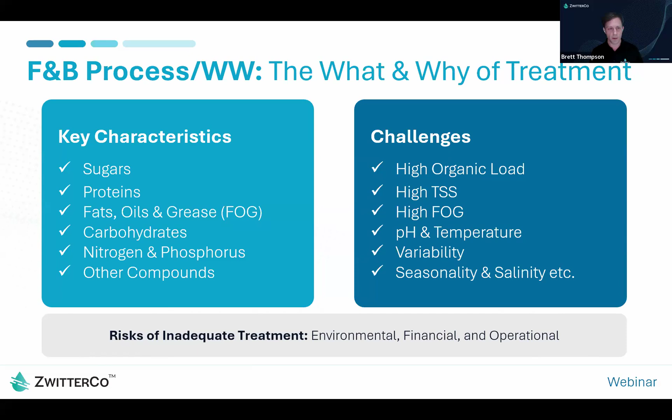Thank you, Brett. After talking about some of the treatment challenges that he was just mentioning, we're going to cover the reasons why there's a need to focus on the wastewater treatment of these plants. As this slide is showing, there are a number of different drivers shaping the wastewater strategies within food and beverage companies. First and foremost is compliance. Regulations around wastewater discharge are getting tighter, whether this is nutrient limits, contaminants of emerging concern, or needing to hit mandatory reuse targets. All are needing innovative treatment technologies to help treat these wastewater streams.

The second on this list is costs. Surcharges for discharge, hauling costs, and disposal fees can be significant at food and beverage plants. The right treatment process is going to drastically cut down on operational expenses to avoid these reoccurring charges.

Third is water reuse. This is becoming a major strategic sustainability goal for food and beverage companies that are trying to reduce their water usage rates. This is especially true in places that have to do water reuse because they're simply lacking available water and they're in water-stressed regions.

Fourth on this list is production continuity. Any disruption caused by treatment issues like too much fats, oils, and greases, variable flows, or changes in feeds can significantly interrupt operations. And finally, a lot of companies are looking to future-proof their wastewater treatment plants, looking ahead towards the next wave of regulations with nutrients and contaminants of emerging concern. Looking around the corner is enabling these companies to anticipate and be prepared for what is coming next.

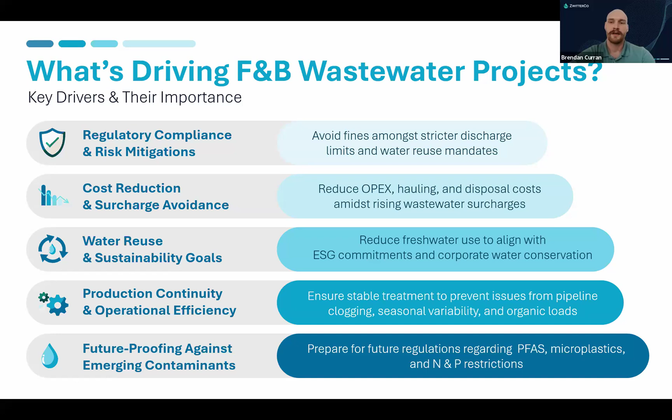Overall, it's not surprising that food and beverage companies are rethinking their wastewater strategies. So now Brett is going to take a closer look at the current treatment technologies that are being used and some of the gaps that are present within these wastewater treatment processes.

All right, thanks, Brendan. Yeah, so some of the most commonly seen wastewater treatment processes in food and beverage plants. Number one would be biological systems. So these are processes where you're using microorganisms to consume biodegradable material, which is typically measured by BOD or COD. And you can also remove suspended solids with these processes if you have a clarifier or an MBR to go along with the reactor. They can also remove nitrogen and phosphorus, some other nutrients from the water, depending on the organisms that you have. So some examples of these, activated sludge is kind of the conventional thing you think of when you think of biological.

These would be a continuous flow through reactor, usually a pretty big footprint. And then these other ones listed here, sequencing batch reactor, MBBR, membrane bioreactor. These are all ways to kind of consolidate the footprint and in the process to have a smaller process overall.

Dissolved air flotation or DAFs are also very common in food and beverage plants. These are, it's a physical process where you're trying to remove FOG and suspended solids, typically by adding coagulants like ferric or alum, and then polymers as a flocculant in order to try to group all of the suspended solids together so that they sink and are removed as sludge. And then you would add air into the tank to try to get the lighter organics like FOG to float to the top.

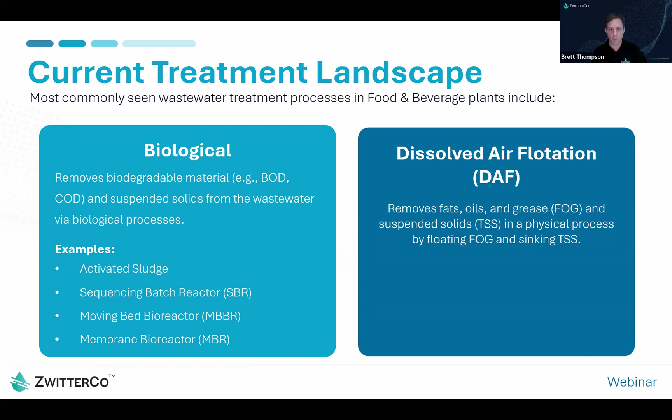So both of these are very mature processes, but they also have some drawbacks. So biological treatment will pass non-biodegradable material. We call that recalcitrant organics, which can lead to issues meeting COD effluent limits.

Biological processes are also sensitive to variations in feed water quality. So if you have different nutrients coming in, different levels of organics, temperature, pH that we mentioned earlier from some of the CIP processes, cleaning chemicals, you can actually stress the microorganisms, and that can result in issues meeting discharge limits. In a worst case scenario, you could actually kill off your microorganisms, and then you would have to spend time, days or weeks in order to rebuild their population. And during that time, you could suffer from fines, surcharges, or even in worst case, halt production.

DAFs are not as prone to catastrophic events as biological treatment systems are. But the issue is that they pass dissolved components. So these make up typically a large portion of your COD and BOD. They're not a positive barrier like membranes, which we'll talk a little bit more about later. So you can also see breakthrough of FOG, of TSS. And so typically to handle this, operators will overdose their chemicals or coagulant, flocculant, which ends up costing more money. And you see diminishing returns where you're adding more chemicals, but you're not necessarily getting better results.

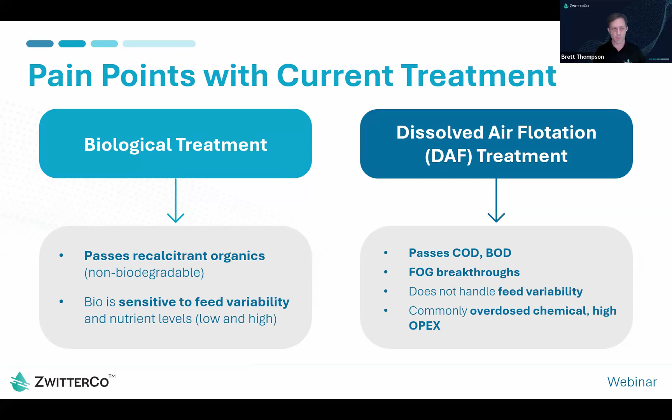So because irreversible organic fouling is such a challenge, researchers and companies have been trying to develop new material chemistries to deliver a meaningful step change, leap forward in membrane performance and to address fouling.

So one of these new chemistries has been developed by ZwitterCo and uses zwitterions. So zwitterions are small organic molecules that have an equal number of positive and negative charges for an overall net neutral charge, and they are extremely hydrophilic or water-loving. So they're so water-loving, they actually create a hydration shell, and that prevents interaction with organic foulants. So they're essentially an innate anti-fouling molecule.

Researchers have been trying to incorporate these into membrane chemistries for over 2 decades, but they're very difficult to handle. So the real breakthrough was incorporating zwitterions into a copolymer, an organic copolymer backbone, which provides structure. These zwitterionic copolymers are able to self-assemble into a zwitterionic membrane, allowing for an actual active layer similar to a polyamide on an RO membrane that's able to recover upon cleaning, even after being exposed to very high strength, high organic fouling wastewater, especially the wastewater you'll see in the food and beverage industry.

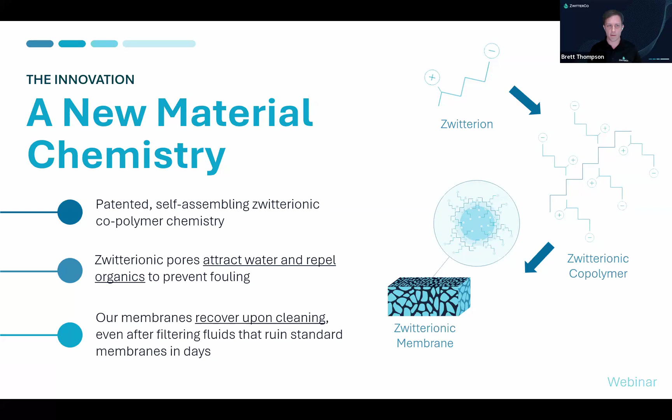I will go ahead and turn it back over to Brendan to talk a little bit about some of the technologies that we discussed. Thanks, Brett. As he was mentioning, the ZwitterCo copolymer chemistry is a technology platform that we've expanded across multiple different membrane products. So I'm just going to quickly discuss the 2 commercialized products that we have available today.

The first is superfiltration, which is what you saw in the video prior to this slide. This was the first product that was commercialized, and some of the key characteristics is that it is a 1 kilodalton molecular weight cutoff, so it's classified as a tight ultrafiltration membrane, meaning that it's still going to allow salt passage. There's 3 use cases for this superfiltration membrane product: treatment of wastewater for discharge, pre-treatment prior to RO, typically in streams like the above use case. We've also used it within process, specialty, and food streams for concentrating specific components within that stream. Like all of our products, it is used in high fouling feed waters. This product specifically is fully compatible with chlorine, and it is exceptionally well at handling oil and grease.

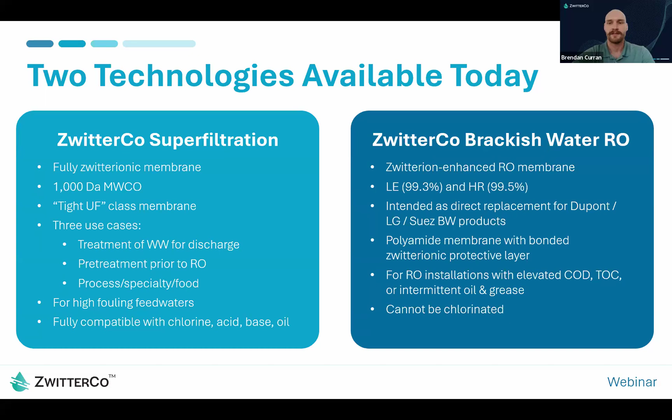As a result of the zwitterionic copolymer chemistry, we have built some of the world's most fouling resistant membrane products, specifically with organics. You are able to reduce chemical costs using these membranes. In a lot of our installations, we've been able to switch from expensive formulated chemicals to commodity cleaning chemicals, and we've also reduced the amount of chemicals and clean-in-place cycles needed. You are going to have faster cleaning cycles using these membrane products, because if you're able to simplify or shorten the cleaning steps, you're going to have faster cleaning cycles.

You will have more system uptime. Our membranes can run for longer between cleaning cycles needed, and if they're able to achieve full performance recovery, which we've seen in a lot of our current installations, you're going to have less production downtime.

We are enabling more reliable, easier, and safer operations, even when systems have higher levels of organics. When you have less system maintenance needed and you're using commodity cleaning chemicals that are easier and safer to handle, it's encouraging this. Lastly, our membrane products offer the industry's highest guidelines for organics and oil and grease limits. They're a one-for-one substitution with a lot of other industry membrane products and allow for easy implementation at a lot of facilities.

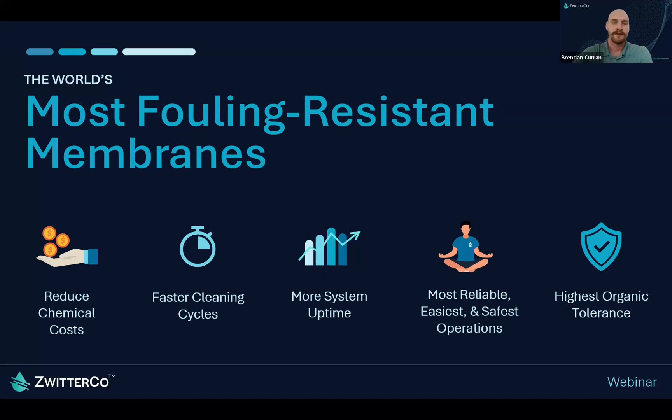At a high level, by incorporating ZwitterCo membranes into your plant, you can not only treat your high-strength wastewater streams that other conventional membranes struggle with, you can also effectively generate clean water for reuse at these sites. So how do ZwitterCo membranes solve the common pain points that we were discussing earlier? Brett, I'm going to hand it over to Brett again, and he's going to explain how we're fitting into different treatment processes with our membrane.

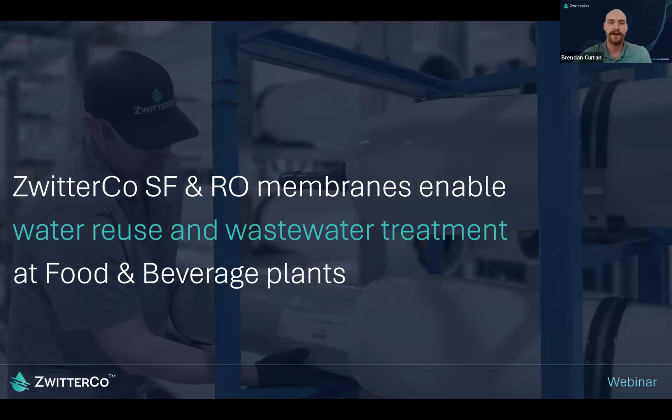As you'll remember, I mentioned biological treatment is really good at removing readily biodegradable organics, but it will pass recalcitrant or non-biodegradable organics, which can be a problem for downstream processes. So one solution is to use ZwitterCo RO after biological treatment systems. Using RO after biological treatment is not a new concept, but RO membranes after biological systems typically are very prone to fouling, especially if you have any breakthrough of organics. On a conventional membrane, you can see fouling issues. So using ZwitterCo RO means you don't have to worry about this, and you can still produce a high quality permeate and meet whatever discharge limits you have, or potentially even enable reuse.

DAFs, on the other hand, the most common pain points are typically the high cost of coagulant and flocculant, and then also frequent passage of FOG and TSS. So using ZwitterCo ultrafiltration after a DAF will completely reject any remaining FOG, any remaining TSS, and it actually lets you, we've seen in a lot of instances, operate your DAF either at reduced chemical consumption or by completely eliminating your chemicals and operating in an air-only mode, which will just remove the bulk suspended solids and FOG. The ultrafiltration membrane can handle extremely high levels of FOG and other organics, COD, so it'll be able to handle whatever gets through your DAF. Running it this way, you can dramatically reduce your OpEx and produce a higher quality effluent.

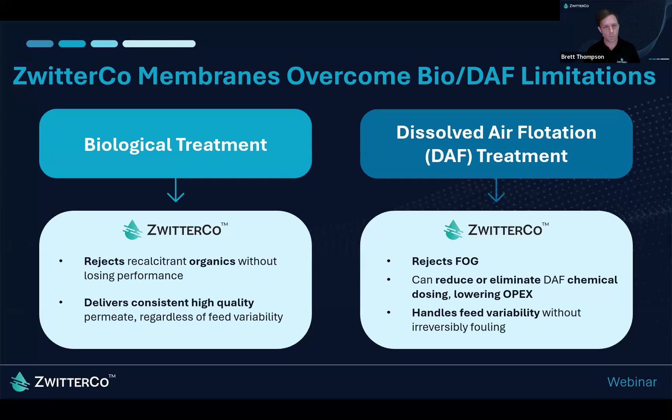Thank you, Brett. Good afternoon, good morning, good evening, everyone. My name is Parag Kachare. I'm the technical director at Esmil Process System. Esmil has been based in High Wycombe, UK for over 40 years. We specialize in providing solutions for industrial water and wastewater treatment with extensive expertise in a wide range of membrane technologies and their applications.

Esmil has developed and supplied treatment solutions for various challenging wastewater streams, including produced water from offshore oil and gas, MDF factory wastewater, acidic wastewater from the petrochemical industry, digestate from anaerobic digestion plants, and effluent from the food and beverage industry.

It is very important to highlight that all these process technologies have been developed through comprehensive piloting, starting from trials in the Esmil lab to prove the process, followed by long-term test work at the site using real-time feed and industrial modules. This approach allows us to gather detailed data, which is essential for accurate plant design, and that also gives confidence to the customer that the process can work.

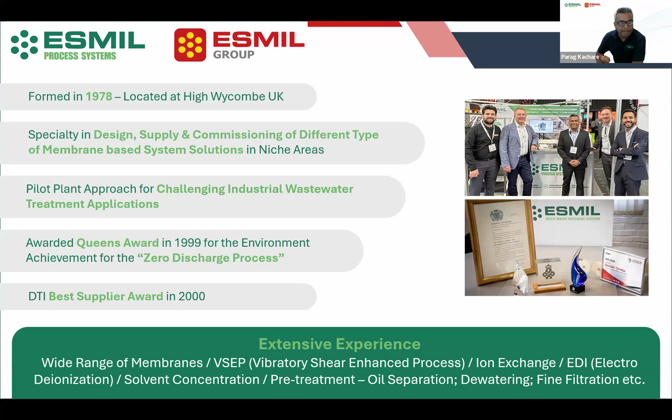Next slide, please. Some pictures coming from the site test work. So we've got the complete setup when we go to the site, the membranes, different types of membranes, the membrane kits for trialing pre-treatment using whether it's ultrafiltration, nanofiltration, followed by reverse osmosis.

And we go to the site, as I mentioned earlier, to collect the comprehensive data for the test work.

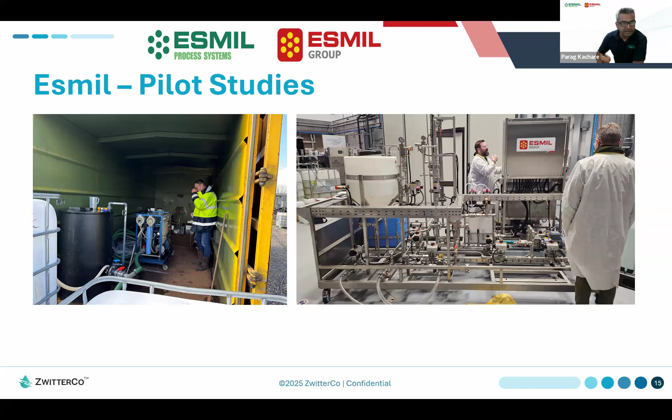This is the setup for one of the customers where we treated the produced water to achieve very stringent discharge consent. It was in the Netherlands.

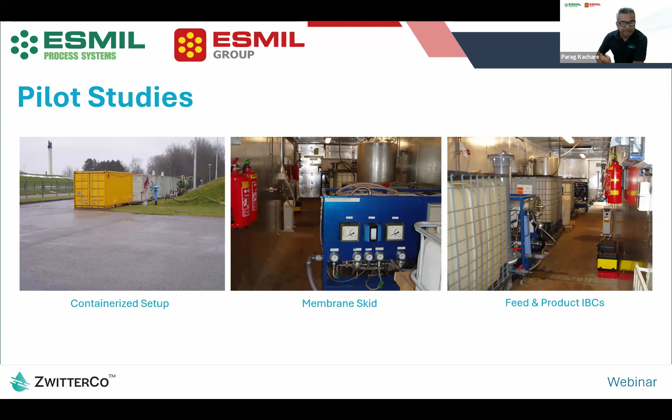Currently, Esmil is collaborating with ZwitterCo on multiple applications. Today, I will briefly present two case studies where original membranes were replaced with ZwitterCo RO membranes, resulting in significant benefits for our customer.

This particular case study is for the effluent from the food and beverage industry. Originally, the water used to be tankered off-site to a nearby anaerobic digestion plant. With the Esmil plant, only a fraction of the feed volume goes to the AD plant, which reduces the transportation cost significantly.

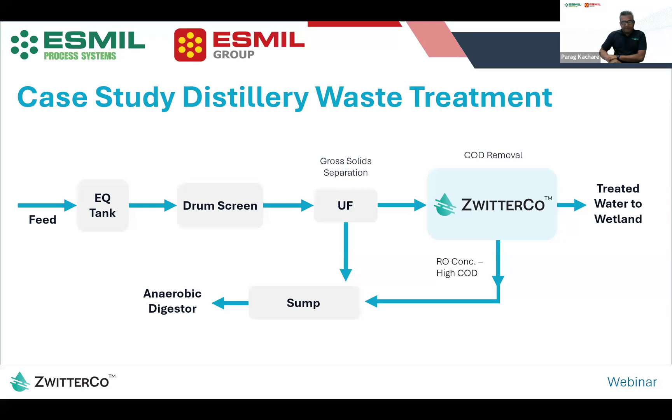Next slide, please. Prior to this project, there were a few technologies offered to the customer, and a technology comparison was carried out. The Esmil process ticked all the boxes with respect to the feasibility analysis as compared to the biological and evaporation processes. Evaporation is an energy-intensive and expensive process, whereas biological treatment is very sensitive to variable feed and has large footprint requirements.

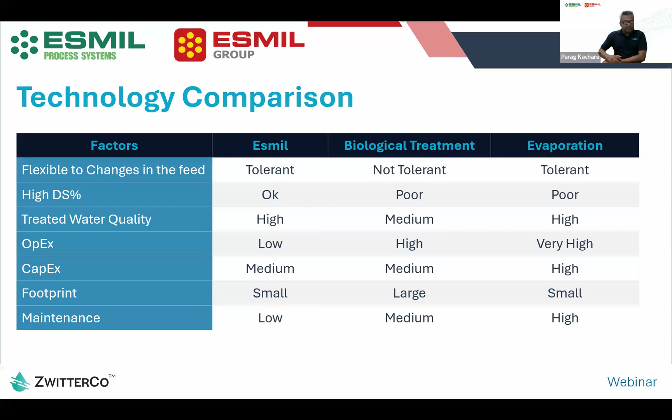Next slide, please. This slide shows the design characteristics of the feed and what we actually saw when we started commissioning. The COD was high in the first place, so we had to do a long-term comprehensive trial. But when we started commissioning, the COD was found to be almost 3 times higher than that.

Because of that, we encountered issues using our original membranes, the non-zwitterionic RO membranes. It was struggling to keep up with the design values in terms of recovery and cleaning frequency. So Esmil decided to replace the standard membranes with the ZwitterCo RO membranes.

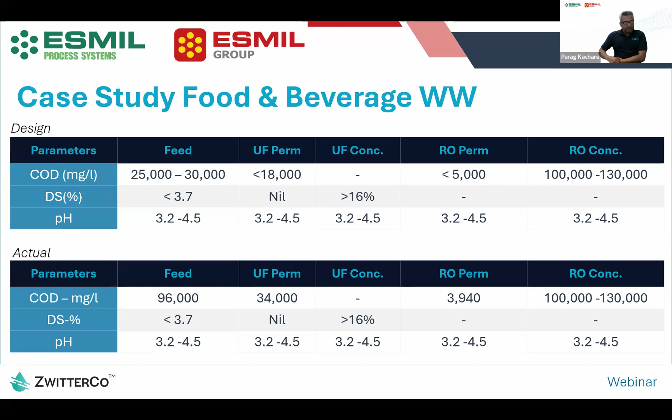Some pictures from the site during the installation stage.

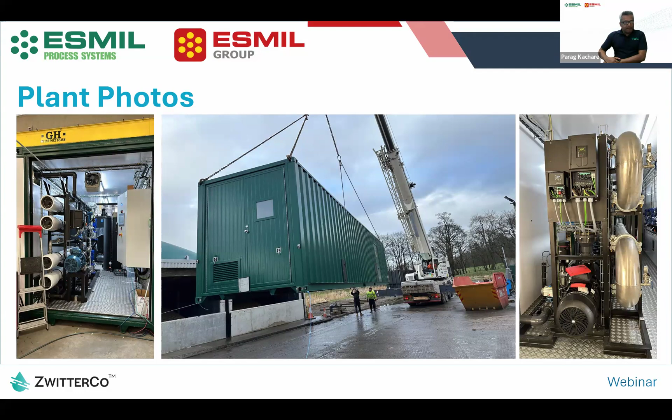As I mentioned earlier, the membranes were replaced, and we had the team from ZwitterCo help us troubleshoot the conventional membranes. We did an on-site autopsy of the membrane and noticed a lot of solids and some issues with the membrane material, so we immediately decided to go with the ZwitterCo RO membrane.

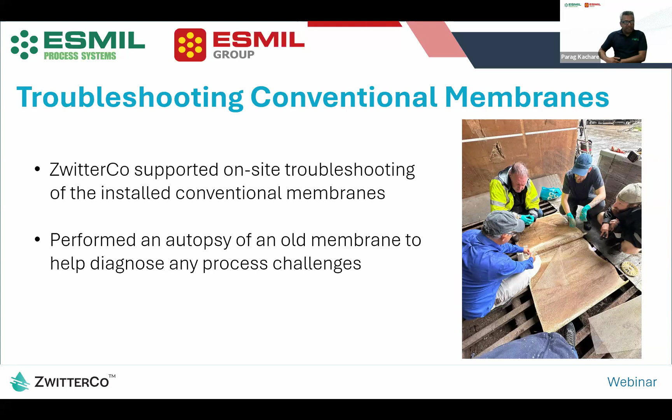This project is non-standard, with very high COD in the field, so there were some challenges. I've compared what we achieved with the original design versus after replacing with ZwitterCo membranes. High organics restricted recovery to 65%, whereas after replacing with ZwitterCo RO membranes, we managed to go up to 75% design recovery, the originally intended value.

The cleaning frequency has gone down. Cleaning used to be carried out with surfactant-based cleaning chemicals, whereas with the ZwitterCo membranes, we just flush with hot water, fortnightly, so a lot of savings on cleaning chemicals.

The operating pressure used to be in the range of 20 to 25 bar. With the ZwitterCo membrane, we managed to reduce it by 25%, to around 16 bar. And the cleaning was carried out at 35 to 40 degrees Celsius hot water with ZwitterCo membranes, whereas it used to be 50 degrees Celsius.

In terms of support, we had very good support from the ZwitterCo team. Whenever we required support, whether spares or technical guidance, we used to get that. In terms of membrane availability, the original membrane supplier would take 3 to 4 weeks, whereas the ZwitterCo membranes have always been in stock, which has been very helpful.

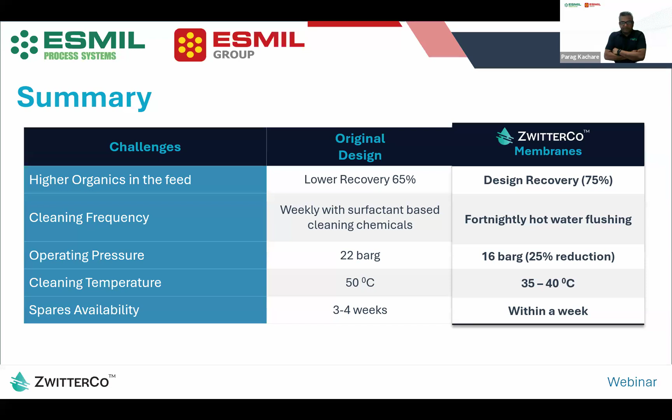I'll go to the next case study, where MBR water is treated with an RO system. Esmil supplied a system to treat MBR water to make it suitable for cooling tower makeup and to blend with the boiler feed RO system. However, the upstream UF system was not always performing as designed, letting a lot of organics slip onto the RO membranes, causing organic fouling and frequent cleaning requirements.

After consultation with ZwitterCo, Esmil replaced the membranes with ZwitterCo RO membranes, which greatly benefited the customer.

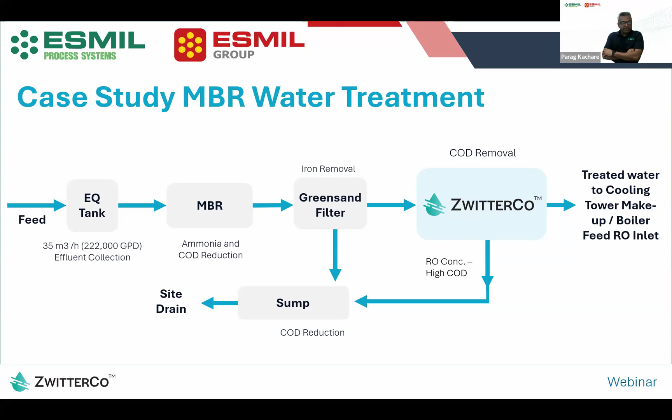In this application, the aim was to reduce the COD, run the RO plant continuously, and reduce the TDS so it could be used as cooling tower makeup water. We managed to achieve that on a consistent basis using the ZwitterCo membrane.

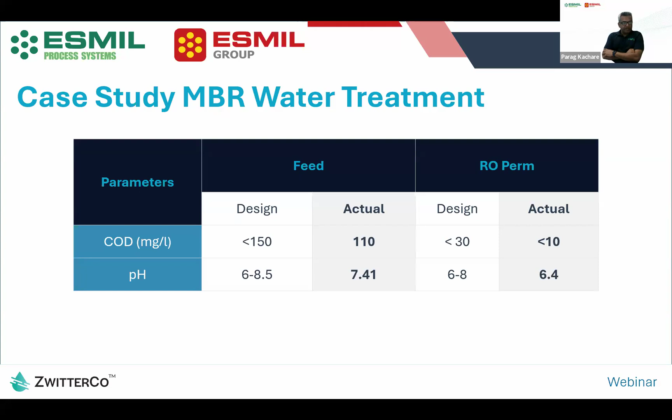To summarize the benefits of the ZwitterCo membrane, we achieved the same or similar results as in case study one: higher recovery, cleaning carried out only with hot water instead of surfactant-based cleaning chemicals, some reduction in operating pressure, and a lot of savings on cleaning temperature and heating requirements. Customer service support has always been fantastic.

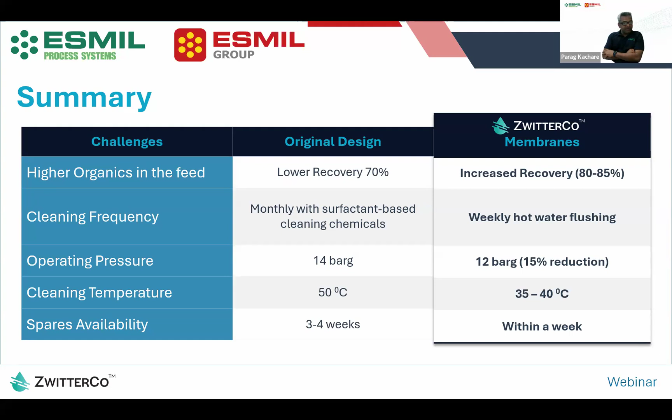I would like to take this opportunity to thank ZwitterCo for their support in this project, and I look forward to working on a lot more projects in the future.

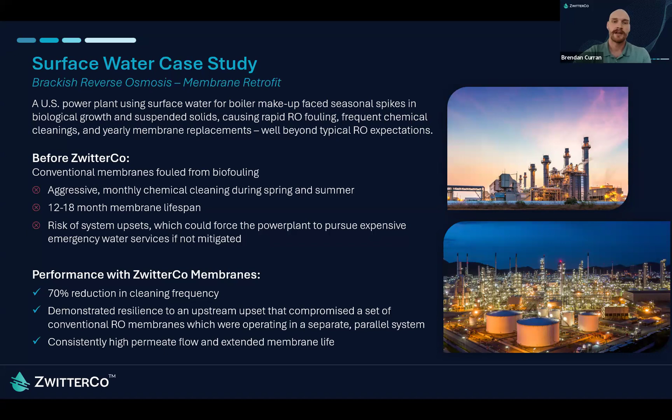So the next case study that we'll quickly highlight is in the landfill leachate space, and I'll hand it over to Brett so he can talk about that.

Alrighty, thanks, Brendan. I know we have a diverse audience here. If you're not aware, landfill leachate is a very complex waste stream that's generated from the water that trickles down through solid waste landfills. We actually recently held a webinar focused solely on landfill leachate, which you can find on our YouTube channel. It also talks about several different case studies and a partnership with Serpol, who also talked a little bit about some of their work in landfill leachate.

But for this particular case study, this was a landfill leachate solution provider that provides mobile filtration systems to help struggling landfills meet discharge limits with RO membranes.

Prior to ZwitterCo, they were using a conventional RO membrane. They were cleaning every other day. Because of that frequent cleaning, which can actually degrade an RO membrane surface over time and cause increased salt passage, they only had a 1 to 2 year membrane life. And then of course there's frequent downtime and maintenance associated with the cleanings.

So they replaced with ZwitterCo's membranes. They went from cleaning once every 2 days to cleaning once every 10 days. That resulted in an 80% reduction in cleaning costs and an expected 2x plus lifetime due to the less frequent cleanings. And because this is a mobile solution provider, they actually saw increased revenue because they're spending less on cleaning.

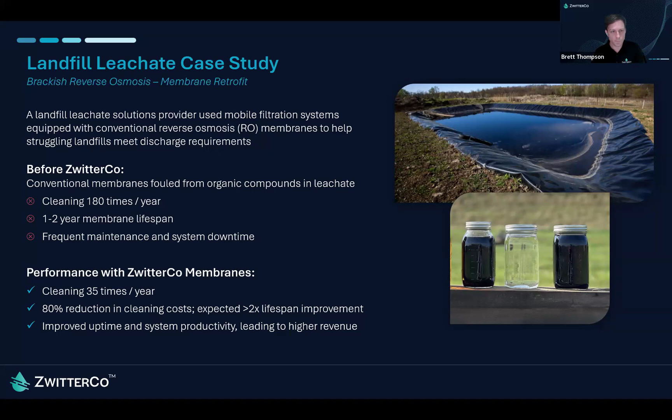Okay, turn it back over to Brendan to talk about the products. So yeah, after all the case studies we've talked about, these are the products that we have commercialized, and these are the products that we use in a lot of these industries.

So we have the superfiltration product. It's available in the 46 mil spacer, and then we have our 3 different RO products. With the high pressure RO product, we have 2 different spacer sizes, as they're often used in the landfill leachate space, for example. And then we have the high rejection and the low energy RO product in the conventional 34 mil spacer size. The RO is intended to be the direct drop-in replacement for the existing RO systems.

In SF, we can work with you on a case-by-case basis to ensure that the systems that we're going to use superfiltration in are designed correctly with you. You can go to the next slide.

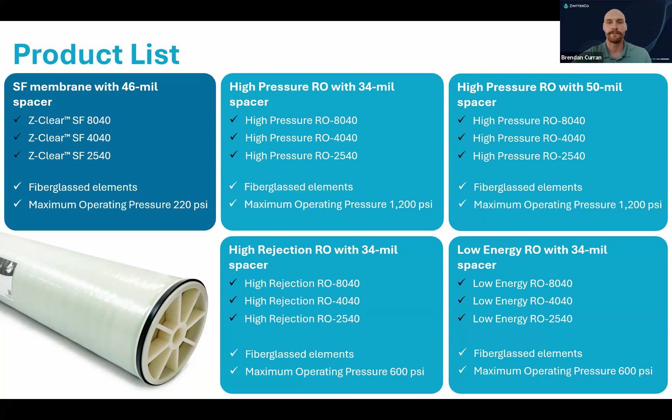So to wrap up what we've presented today, we've covered a lot of material and wanted to summarize a few items. The most important thing to know about ZwitterCo membranes is that they're truly unique in their ability to deal with wastewaters that have a lot of fats, oils, and greases and other organic foulants that conventional membranes often struggle with. We are helping promote sustainability within the food and beverage industry and other industries, and we would love to work with you to understand if our membrane products can be the right solution for your wastewater treatment processes. So thank you all for attending this webinar.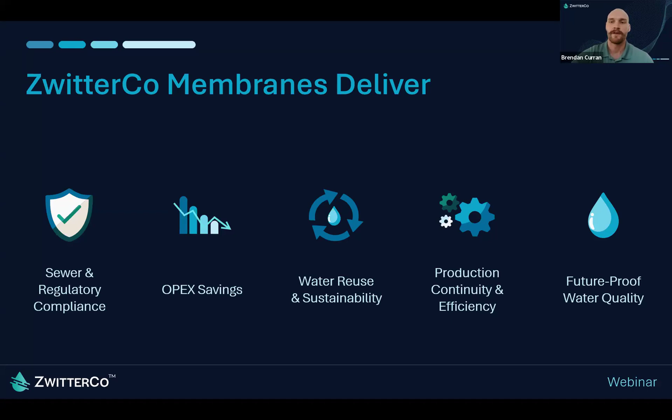Thank you, Brendan. I can see we've had quite a few questions in whilst we've been talking, so let's get started. First question we've got here is: is ZwitterCo just making membranes or systems? Are you marketing to integrators or end users?

Yeah, I can answer that. So both. We're actually going to have a webinar this summer that talks about our solution capabilities. But yeah, we're able to do both. We can make systems for certain projects, and we work with integrators, we work with channel partners for their solutions as well.

Brilliant. Okay, and then the next one is, what is our high organic tolerance?

I'll answer that one. In terms of specific organic limits, especially with the reverse osmosis products, we don't have a specific limit in mind right now, but what we're noticing is that in streams feeding higher organic loads into their RO systems, when we're put in, we are experiencing better operations than the existing RO systems on site.

Okay, next question. Would concentrate from the RO with ZwitterCo membranes not be at a higher TDS, TSS, BOD, rendering it difficult to dispose of?